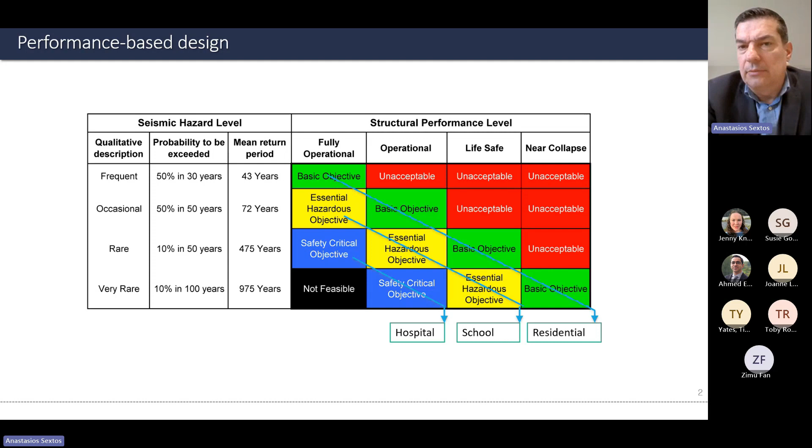So that's basically the way we are designing things in half of the globe, I would say, which is a seismic region. And this is evolving gradually from performance-based engineering into what we are calling resilience-based engineering, which is basically assessing the consequences first and designing to mitigate them in terms of downtime, functionality loss, financial loss and the like, and obviously casualties. So this is the new generation of design of structures.

Now, the problem while talking about resilience is the fact that resilience is very difficult to quantify for a number of reasons that have to do with social and financial factors, how we actually measure downtime, the extent of the loss of functionality. But something I would like to draw your attention to, because it's basic before we start talking about other things, is that resilience is essentially a function of time. We could be talking about a structure, a network of systems, a network of services, a single person, it doesn't really matter.

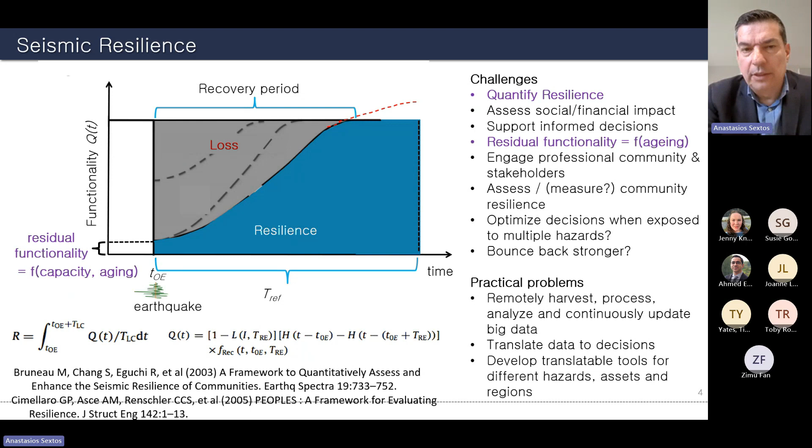Essentially, this functionality or operation is, let's say, 100% before the earthquake and drops down to a residual functionality, whatever that is. Then the system, the person, the building, the bridge, London Underground, Network Rail, whatever, recovers gradually in time until it reaches the status quo ante, the previous state, or even exceeds the previous performance or operation. What happens in between is the loss. The smaller the loss, the higher the resilience. This is how we engineers aim to quantify resilience. Obviously, in social sciences, it's a little bit different, but the idea is essentially how can we recover in the minimum time with the minimum resources to the best possible state.

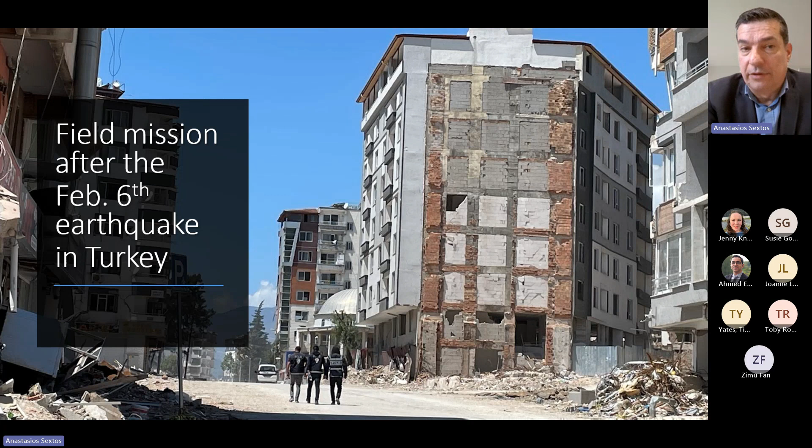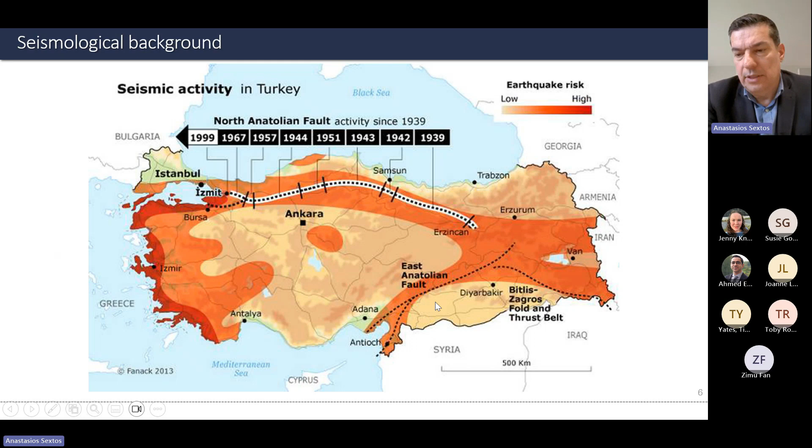Now, some slides from the devastating earthquake that took place about a year ago in Turkey, which was a very strong experience for those of us that visited the place, something that you don't see very frequently, but it relates a lot to the resilience I was talking about. If you're familiar with the earthquake map and the geography of Turkey, this is the East Anatolian Fault, whose rupture led to two very strong earthquakes back-to-back last year.

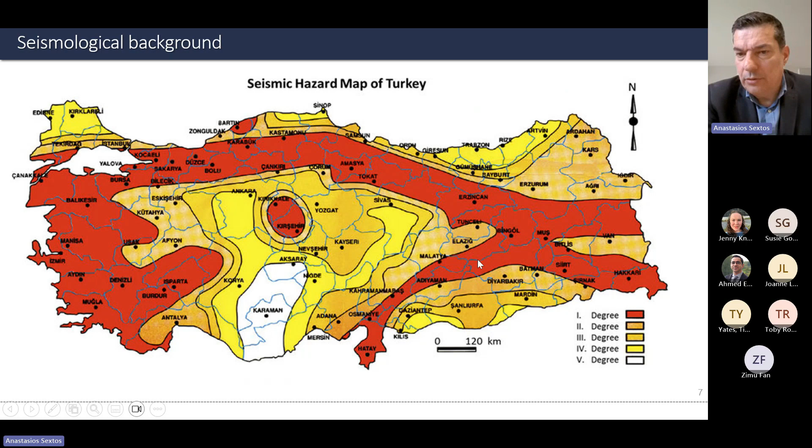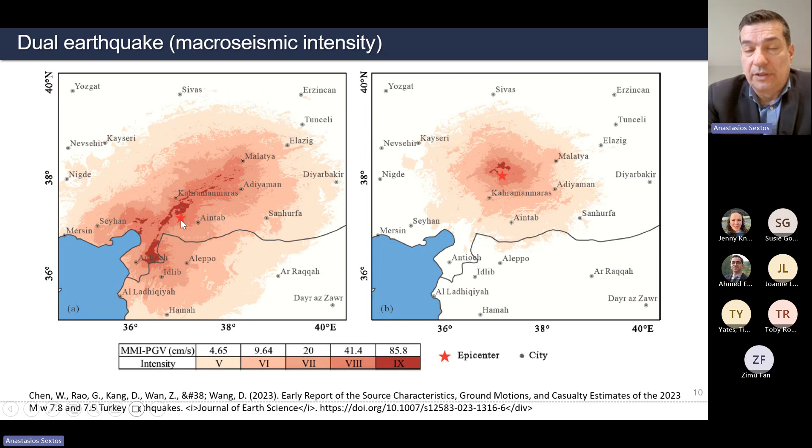And this is a region of high seismicity, because buildings are designed with requirements that are stricter in the places that you see highlighted in red. So we're talking about a region that is known for strong earthquakes. And therefore, as devastating as it is, it was expected, in a sense, to have two earthquakes in the same region, but measuring very strong, 7.5 and 7.8, at a difference of 8 hours.

There is a very simple diagram that we use in earthquake engineering called the response spectrum. On the vertical axis is the acceleration that the building is experiencing. And because acceleration times mass makes a force, according to Newton, that's the force induced on the buildings. On the horizontal axis you can see the period, or let us say, how high a building is. In red are the forces for which buildings are designed in Turkey, with a very advanced seismic code, I have to say. And in gray are the actual accelerations that were monitored during the earthquake.

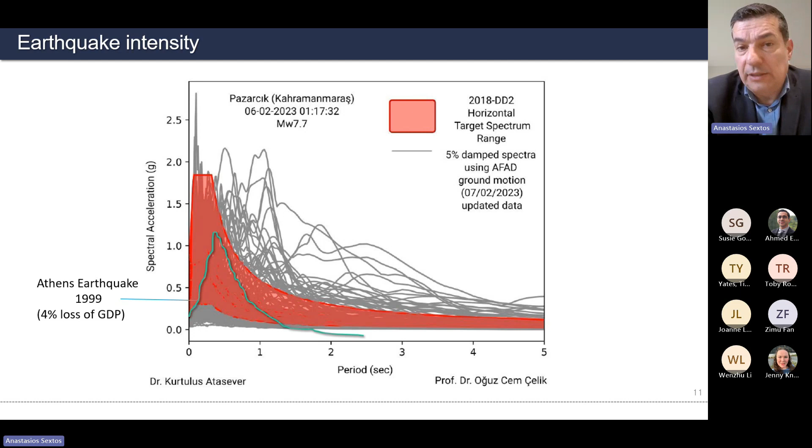And you can easily see that the gray is exceeding the red across a wide range of frequencies and periods, which essentially explains why all these buildings, irrespective of the height, suffered from heavy damage.

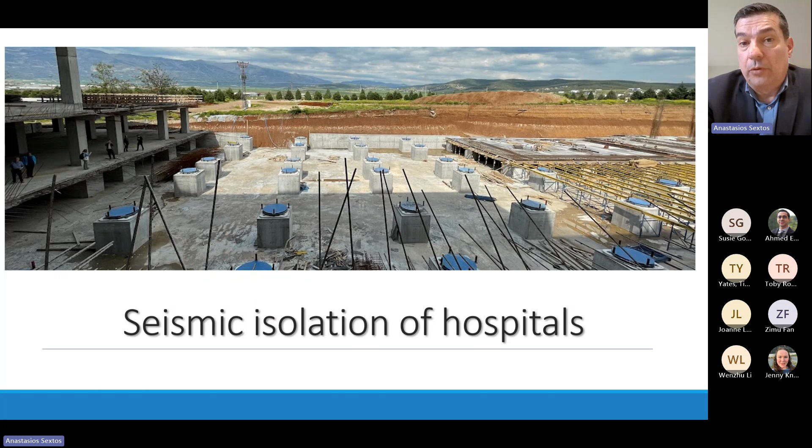Some good news, if we can find good news in this disaster, are seismically isolated hospitals that have performed very, very well as designed, actually. This practically means that buildings are able to slide. There are devices called bearings on a very smooth surface. It's something like a ball that is sliding and is allowing the ground to be moving, but the building not to be experiencing the same accelerations. And then the whole thing is restored back in place.

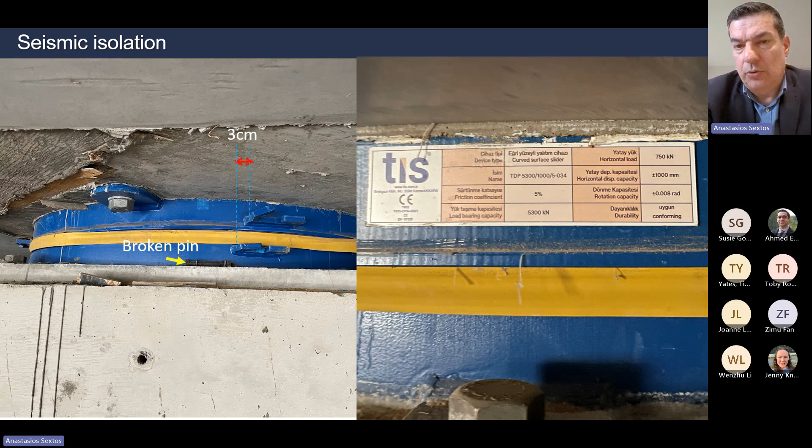And you can see here some successful applications of this technique, with the buildings effectively without a glass broken, whereas other buildings nearby were collapsing. So this is definitely a technique that is very, very promising. The problem is that it's quite expensive. And currently, across the globe, even in developed countries, it is only used for critical infrastructure like hospitals and some administrative structures that have to remain functional after the earthquake.

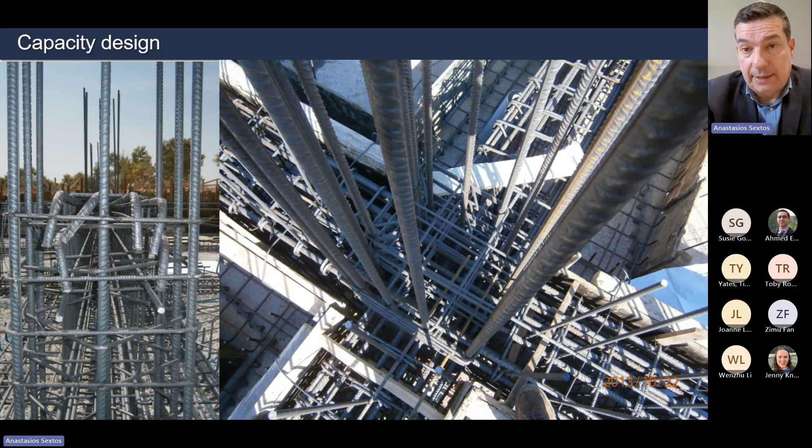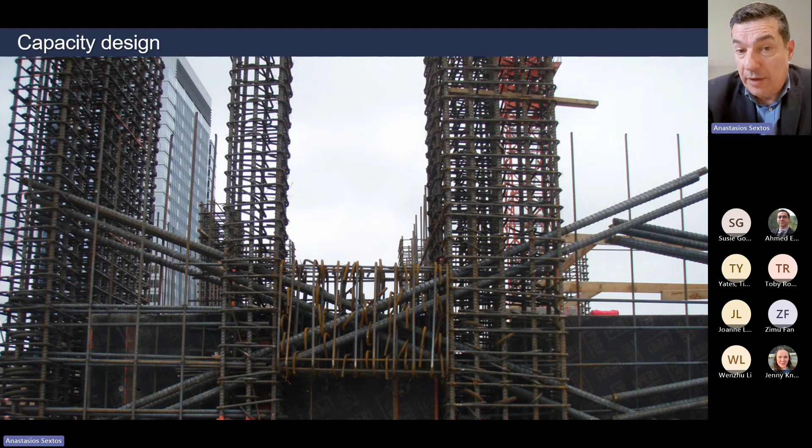So most of the buildings rely for their earthquake resistance on very strong reinforcement. This reinforcement can be very dense, can be very difficult to implement, has a lot of quality control to be ensured, and effectively means that in some parts of the world, yes, you can definitely satisfy these very strict rules, but in other parts of the world, that's what you're seeing.

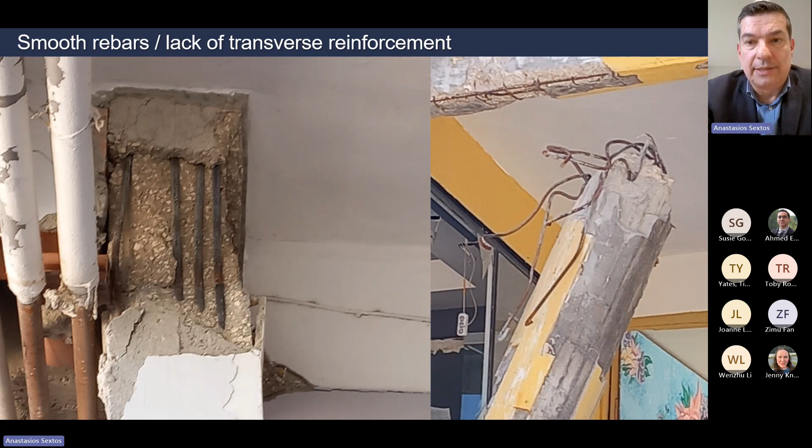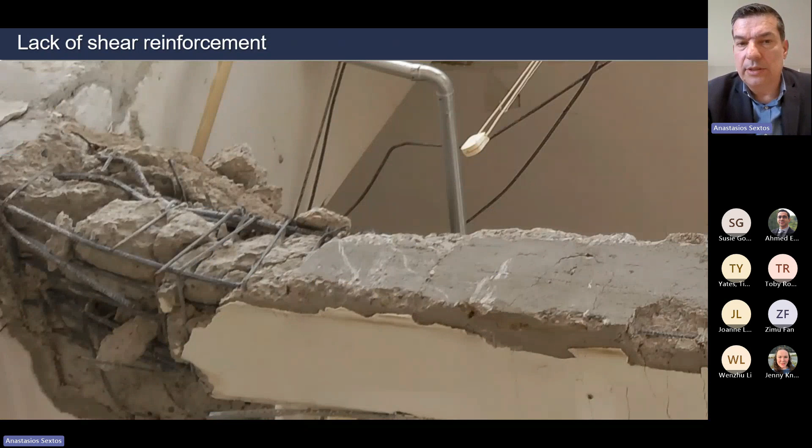If you walk around places like where we visited in Turkey, but also in Greece, in Italy, in some poor regions, in some places where the quality control hasn't been applied properly, or in places where simply the buildings were old enough, where the new knowledge hadn't been implemented at the time, let's say buildings before the 80s. You can just get an idea.

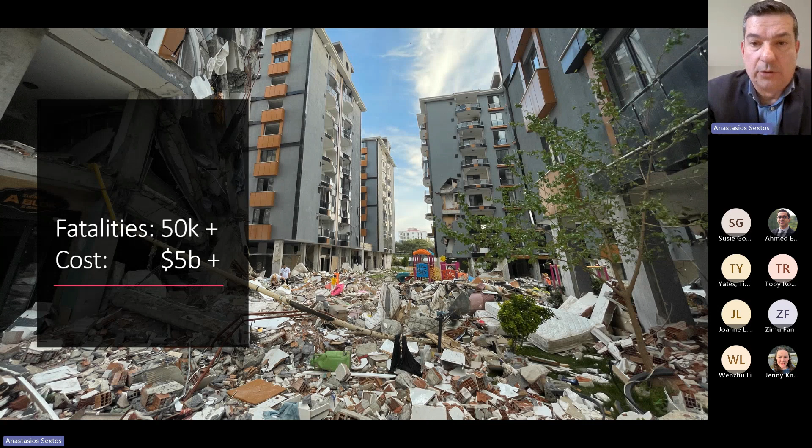That can happen in developed countries, like in Turkey. In developing countries, like Nepal, a similar earthquake in 2015 led to the evaporation of 50% of the GDP in 10 seconds. That's how long the earthquake lasted. So in 10 seconds, 50% of whatever the country owned was lost.

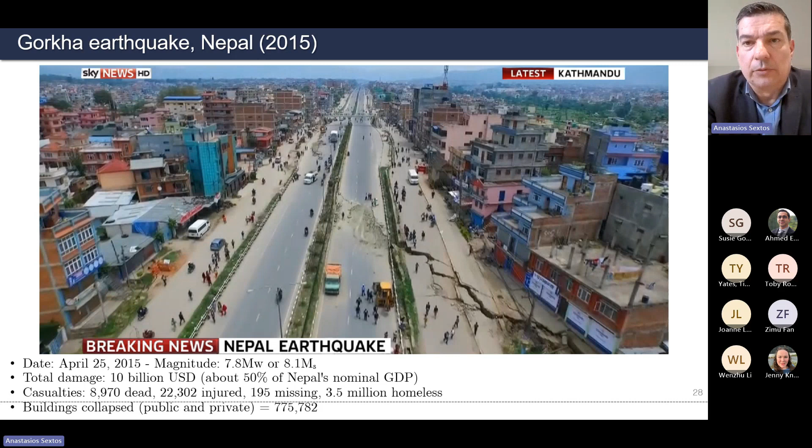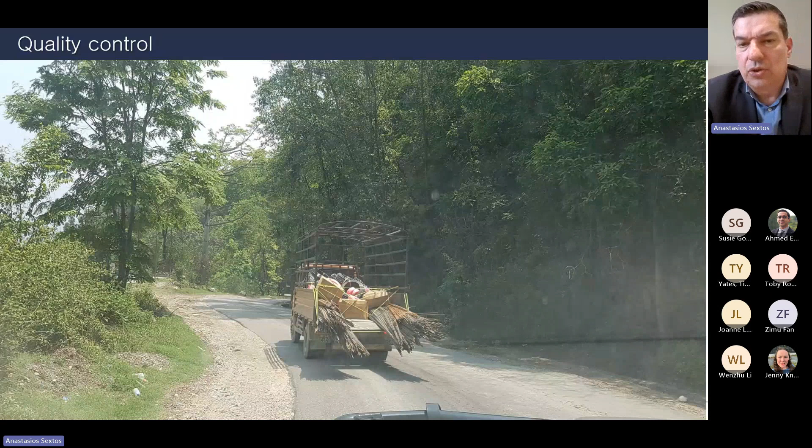So the question is, how can we actually implement quality control in these regions where steel and materials are transported like that, or there's no access to materials, or they are transported in ways that do not satisfy the strength or the resistance of the buildings, and the techniques are pretty much local. So yes, performance-based design and resilience-based design is a very good idea, but it applies essentially to the developed world. In low-income countries, the performance objectives are different.

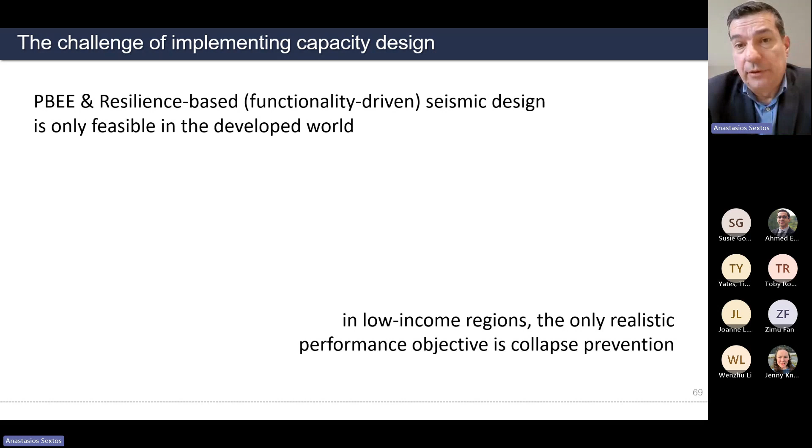So we came up with this idea about 10 years ago. What if we don't trust the superstructure to perform properly in case of an earthquake? And for this reason, we create a base where we will let the building rest with the capability to slide. Slide in a natural way, in a low-cost way, in a low-tech way, with materials that can be locally resourced and could be culturally acceptable by the people.

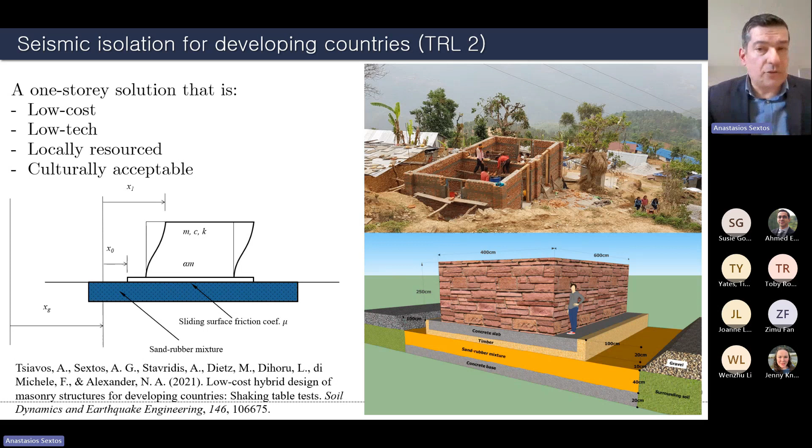Is there such a solution? That would be TRL 1 or 2, I would guess. Let's say the idea, technology readiness level, very, very low. Can we actually do that in reality? People in the ancient world, yes, they thought about it, but in the modern world, how can you apply such a thing? This is the main question.

So we had a large project with many, many partners, including the University of Southampton, Caltech and Buffalo from the US, and Nepalese partners, Arup International Development and Save the Children. So we started studying first the materials. I'm not getting into too much detail. I just want you to get the feeling of how we can turn an idea into practice through large-scale experimental testing.

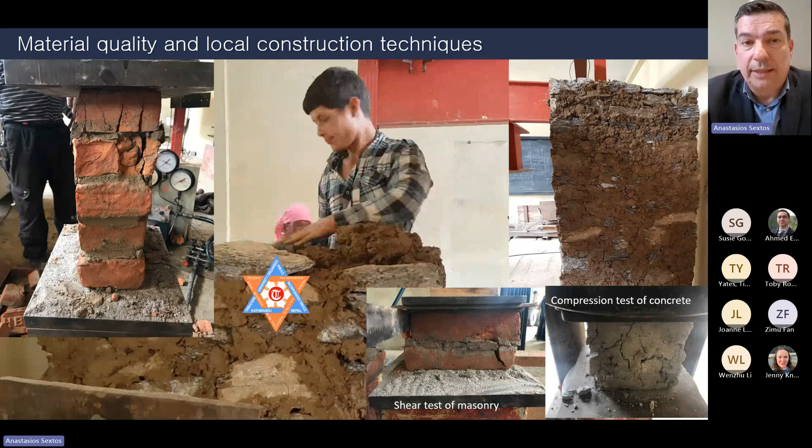So the idea here is that first you have to trust the local people. Let them build in the way they normally build. Don't try to mimic this and bring it to the UK and think that you can do it in the same way. You can't do it in the same way. So we did it locally in Kathmandu. We tested it locally. You can see here even the manual way forces are applied.

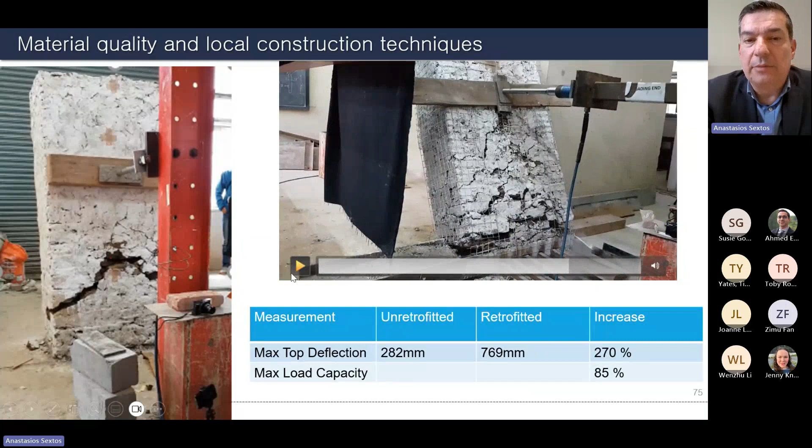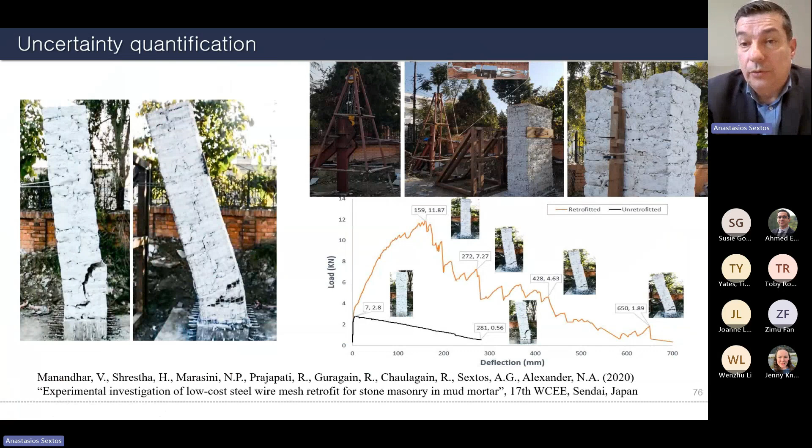At some point, obviously, if you apply too much force, these walls will effectively fail and collapse. And if you repeat it many times, you will be able to assess the capacity of this type of construction. Because if you really want to improve something, you have to understand it. You go there, you interact, you collaborate with the local people. There are too many things you can learn.

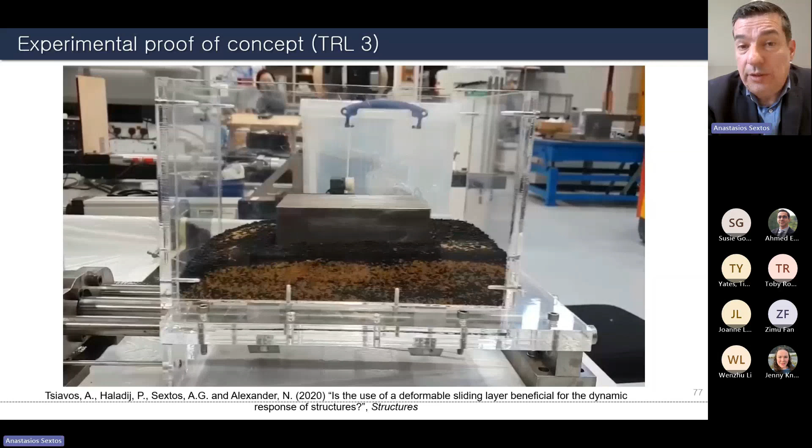Then you go back to the UK in this case. And we said, what if we rest a small building, a very, very small steel box, if you like, on sand mixed with some chopped rubber, which is very cheap to do? Would this box really slide if we shake it? Well, yes. So in principle, it's working. But the bad news is that at the end of the day, it is also tilting a lot. Maybe you can observe it even visually.

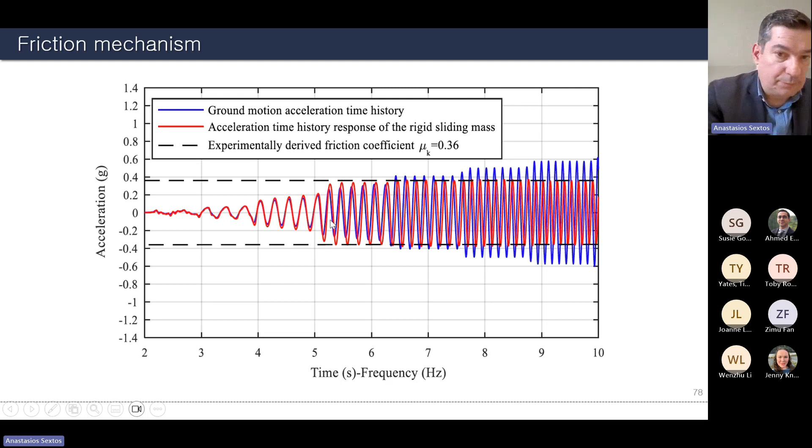So in mathematics, everything works beautifully, and you can say that because the system slides, there is a cut-off acceleration. There is an upper bound of the energy that gets into the structure, which is the red one. So you're applying the blue, and the building is experiencing only the red. So you're doing good. But if you end up with tilting, if you end up with settlements, if you cannot use your structure anymore, what's the point? So we had to try different ways and do this proof of concept at a large scale.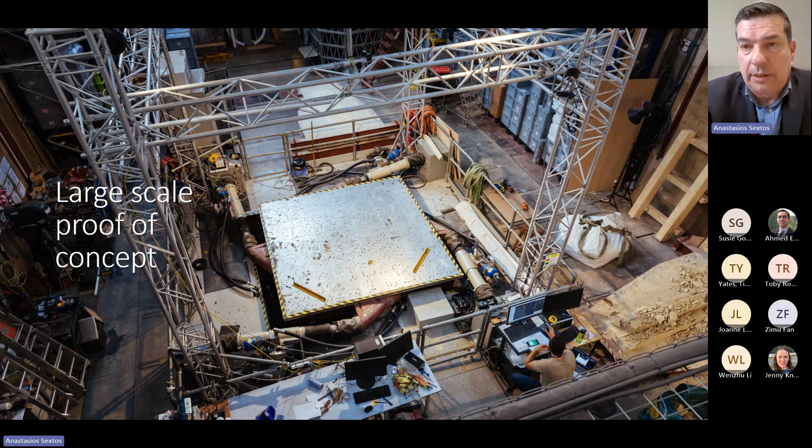This is the laboratory before UKCRIC, the shaking table in the earthquake lab in Bristol. It's a 3x3 shaking table, 6 degrees of freedom with 8 actuators. You can place on that a payload of about 15 tons and accelerate it up to 2G. So that's about twice the earthquake measured in Turkey. So this is very, very large, I would say. And you can do that for 6 degrees of freedom, 3 translational, 3 rotational.

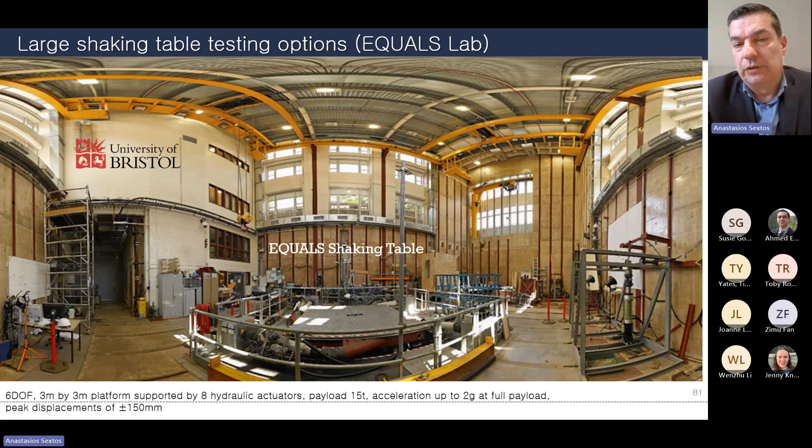But with the aid of UKCRIC, we built a new lab, which I think is way more powerful. This not only has a 3 degrees of freedom shaking table that is larger, but also has a soil pit for tests that involve soil structure interaction. The good thing about the shaking table is that the payload is now about 50 tons. That's the weight of around 30 cars stacked one on top of the other, and you can accelerate that up to 2G for a frequency that ranges from 1 to 50 Hertz. So this is really very, very powerful.

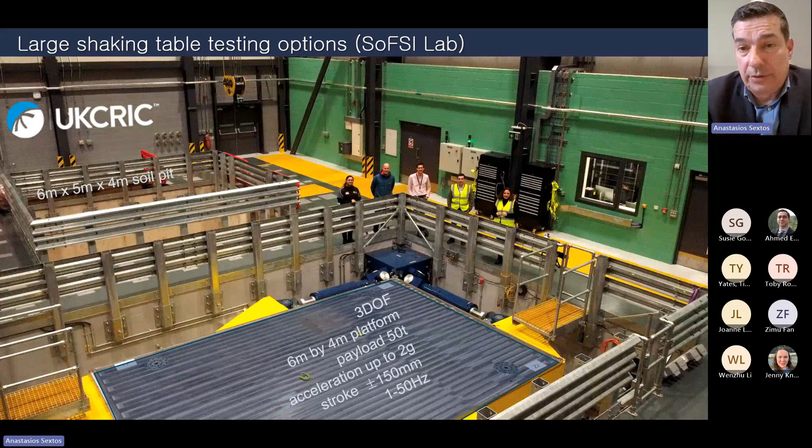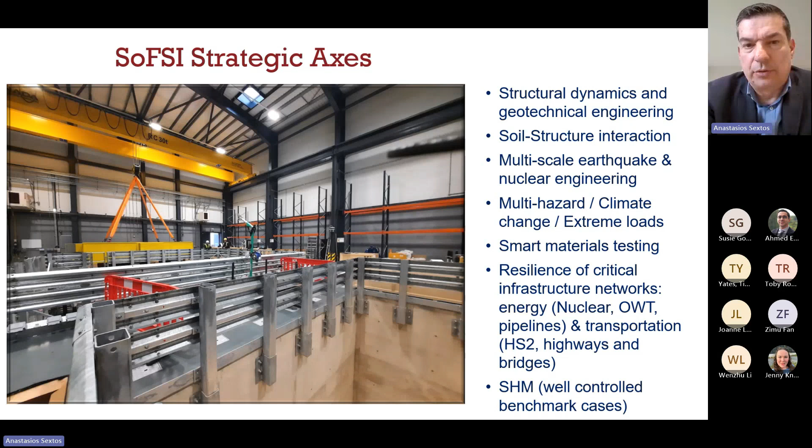And in this laboratory, we can test things that relate to structural dynamics, geotechnical engineering, soil structure interaction, everything from small scale to large scale, from a single hazard, that is earthquake, but we can also have an environmental chamber and use water flowing into the soil pit. We can test multiple hazards. We can reproduce to some extent floods. We can test smart materials. Overall, we're looking at the resilience of critical infrastructure. You can see how the shaking table looks and how it is moving in 2 dimensions. This is really a very, very powerful tool.

Currently, through new projects, we are testing 3D printed units. We are testing buildings designed with new materials. We are testing structures placed into this large shear box filled with sand to include soil structure interaction in our analysis. Whatever involves dynamic loading, whatever involves a case where the loads come from the bottom to the top, that's the shaking table.

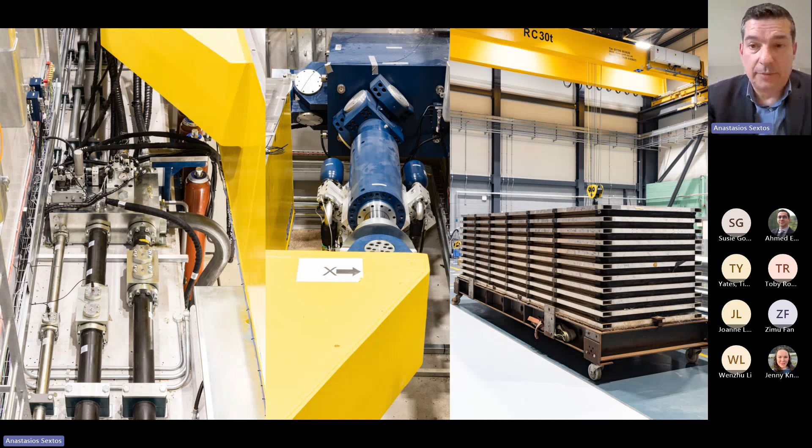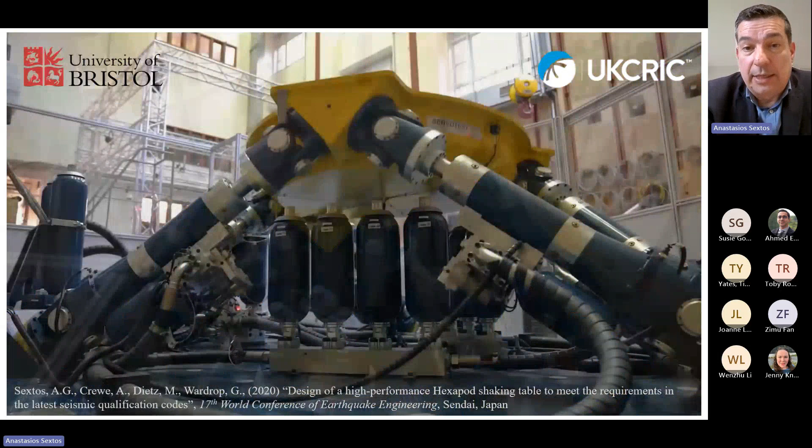In case we need to test something to very high accelerations like 10G, we are going to be using the hexapod, this mini monster, which can go up to very high accelerations for specimens that are smaller, like components of structures located in high-rise buildings, aeronautics or mechanical devices, and other protection schemes.

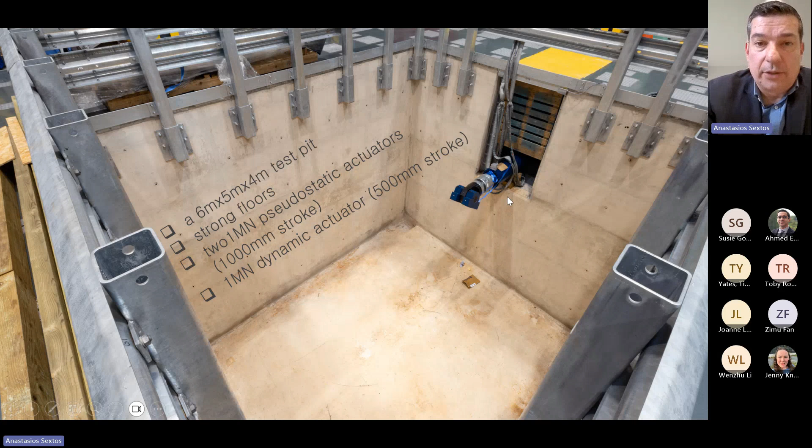And of course, we've got the soil pit, which is a 6 by 5 by 4 meter underground room, if you like. We can apply lateral forces from the side using large 1 meganewton actuators, or we can mount the actuators on the strong floor, or we could create a reaction frame around the soil pit and apply forces from top to bottom.

This is an excellent example of a test that we ran with the University of Southampton and the University of Birmingham as part of Plexus Plus, which was also funded by UKCRIC, and we're grateful for this support. We ran thermal tests, contraction and expansion of integral bridge abutments, filling the pit with sand.

You can see also here how the sand was transferred, how the loads were applied, how does it look like when you push laterally. Everything is instrumented with fiber optics, with pressure cells, and with all the instrumentation you can get. Now we can do that statically, we can do that dynamically. We can test here wind turbines that are supported on sand conditions. We can test floating turbines if we would like to introduce water because there is drainage in the system.

We can do hybrid testing, that's substructuring, and effectively we're preparing now a fantastic test on timber buildings, which is very interesting to do by applying lateral wind forces externally. So these are the new capabilities that we would love to welcome you all to visit and explore possibilities to use the new facility.

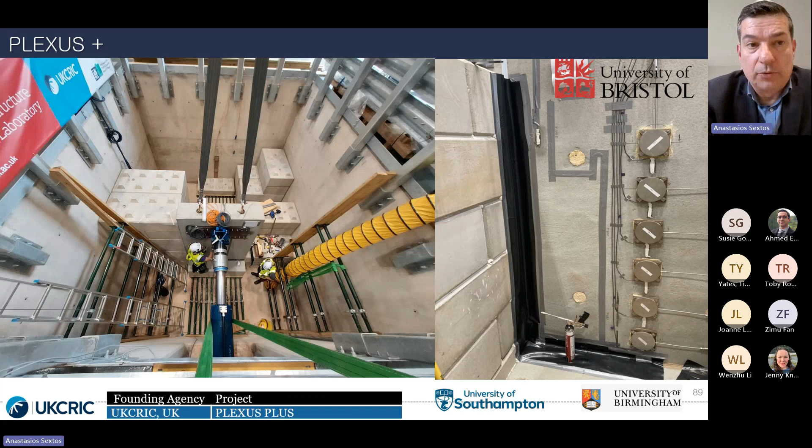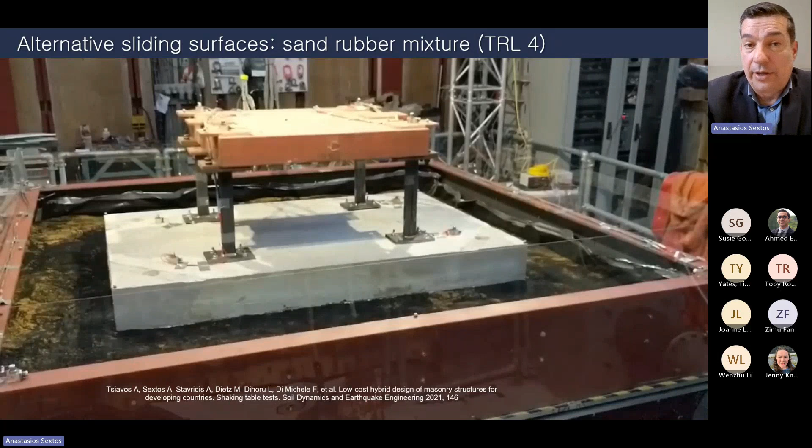But in the meantime, I'm just thinking back to the previous laboratory for one simple reason. Because the tests we were running were involving the vertical component of the motion as well, since this gets into the calculation of the sliding, and therefore we had to do it in the shaking table, which has 6 degrees of freedom of acceleration, including the vertical. For this reason, you can see that we did these tests in a larger scale compared to the small box we were looking at. But effectively, what we learned from this is that, again, it's working very nice, but you end up with some permanent tilt, which is never a good idea.

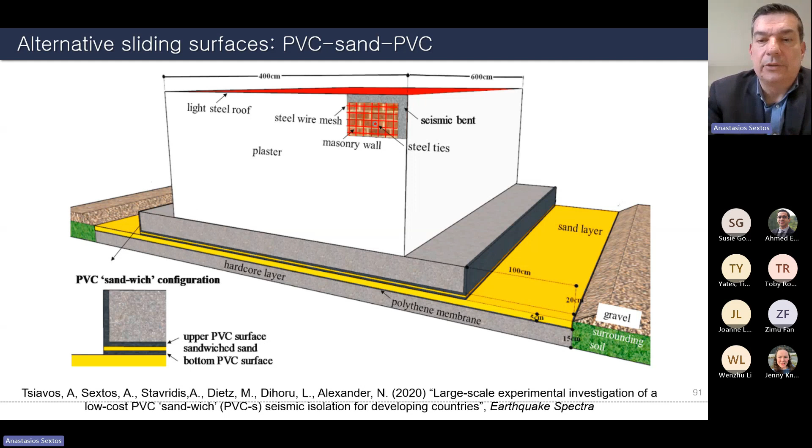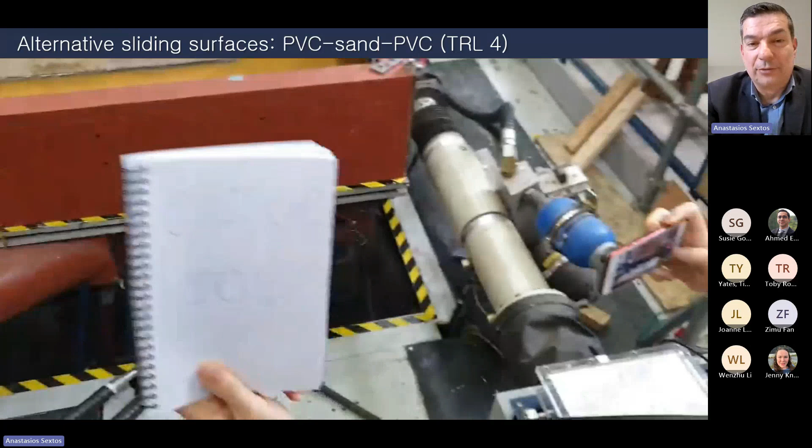So the question was, can we do it differently? Can we actually have a sandwich of plastic, sand, and plastic, and also concrete on top and concrete at the bottom? So it's concrete, plastic, sand, plastic, and concrete. That's the sandwich. And this controls very well the sliding to take place at this specific sand interface. But from this idea into running this test, it was always a challenge. I already told you how challenging it is to convert an idea into something tangible. But you can see here that this time, if you let it slide, it slides in a very controlled way across a very specific interface.

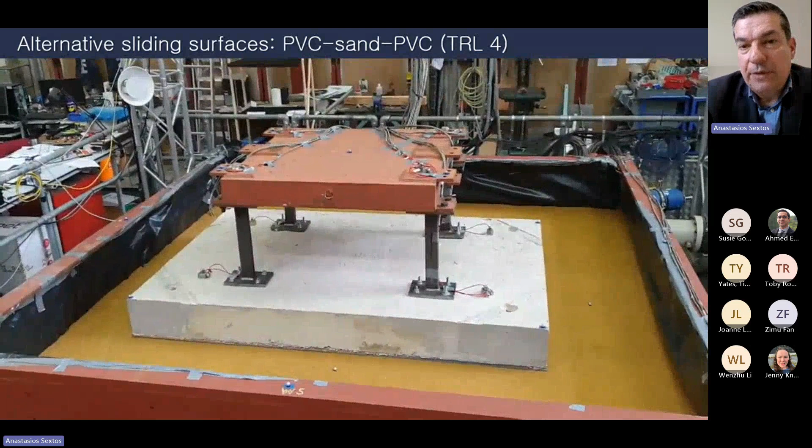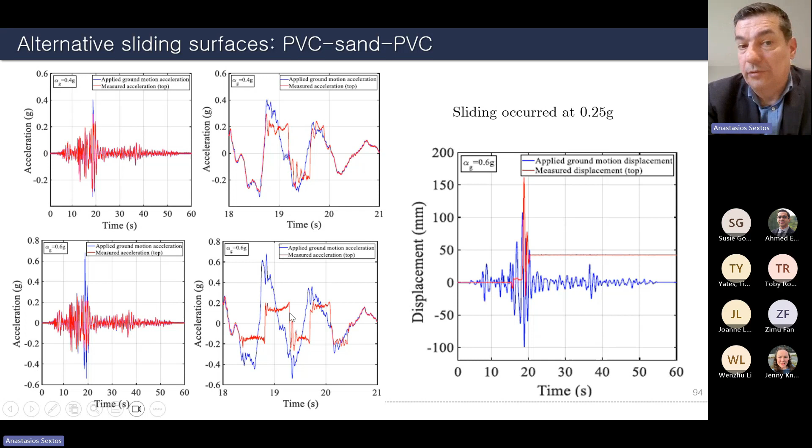And this gave us the advancement, if you like, to reach technology readiness level 4, which means that not only the proof of concept is working, but technologically it can be reliable enough to design further the details. And you can also see here that you are applying the motions, the displacements in blue, and the building is basically doing what you see in red, which is leave some permanent displacements, but in terms of acceleration that relates to the force, the red is always capped at the time that the system is sliding. So without sliding, it would do the blue acceleration, but with sliding, it can only do the red, which is always a good system, I would say.

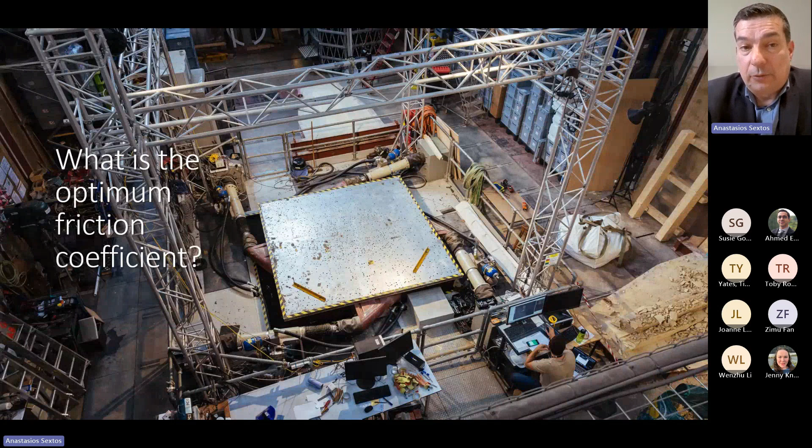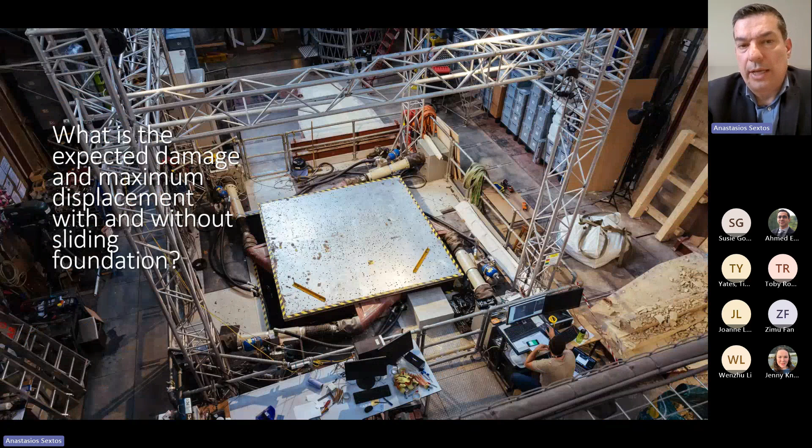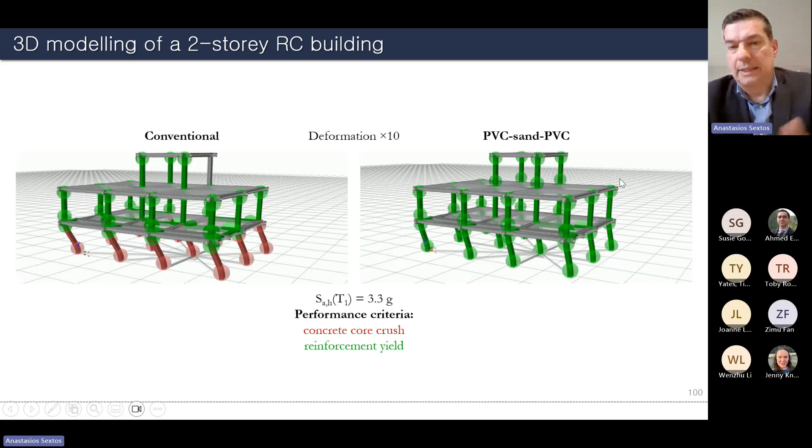So another question was, what is the optimum friction coefficient? That's also an experimental question. And we had several tests that we did using also rollers on the sliding surface with different densities and different sizes. And we also had a very extensive set of numerical probabilistic assessment of buildings mimicking the properties of these buildings. You can see, for instance, on the left, the prediction of an ordinary building that effectively becomes red and collapses because all the first story is lost, whereas the sand building, the PVC sliding system, let us say, remains without collapsing. So these are just some illustrative examples and some technical metrics that we have to compare.

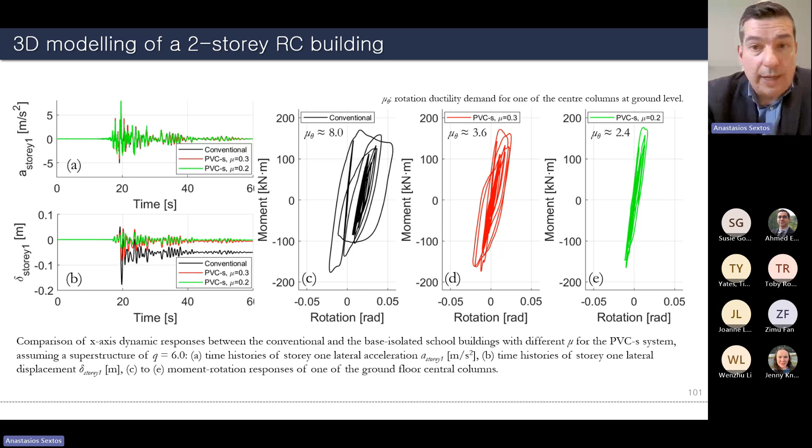When you see a lot of hysteretic behavior, that's a lot of damage. That's what the black line tells us here in the moment rotation diagram. When you see the green one, which is very, very slim, this means that there is no absorption of energy, therefore there is no damage. Therefore, that's a way, way better way to protect the building.

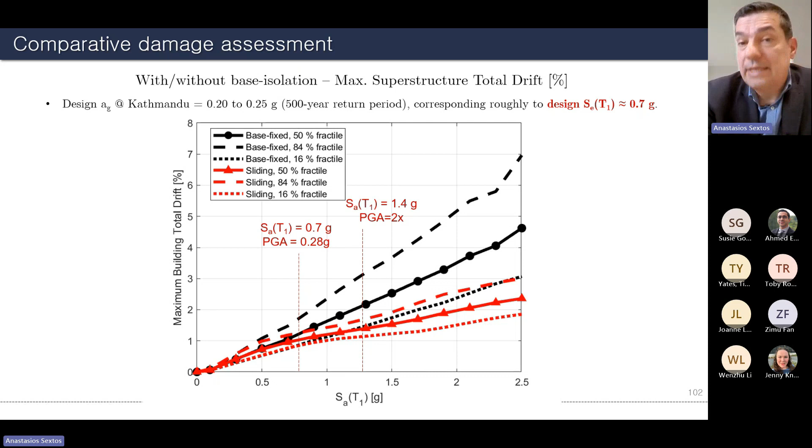And it's low cost. And after all, it's quite effective, because if you do this probabilistically and take the mean, which is the solid black line of a conventional building, with the dotted lines being plus minus one standard deviation of the damage of the building, that's what drift shows in the vertical axis. Essentially, the red one, which is the isolated in a low-cost way, always has way lower damage.

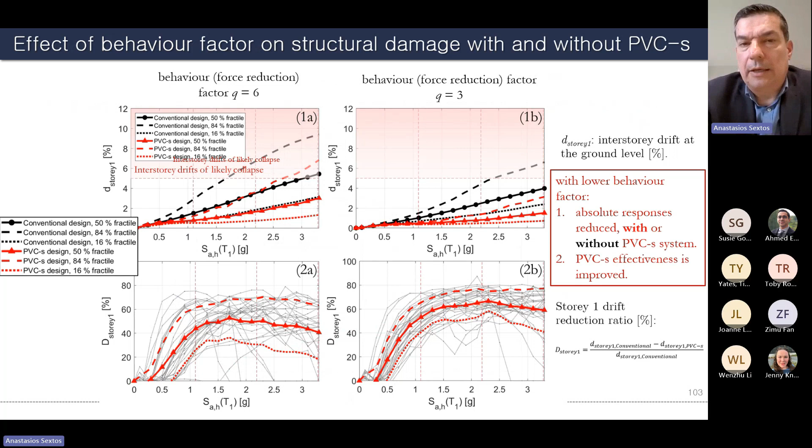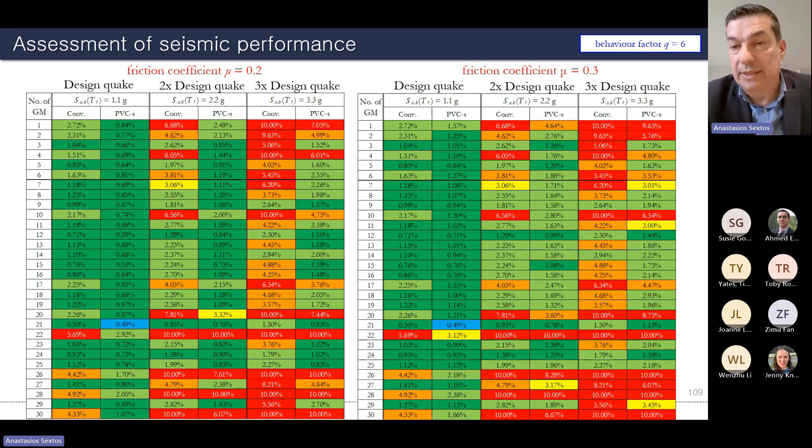Again, I'm going to skip these slides that are perhaps too technical for this purpose, because that's not the purpose of this talk. Just to say that for clarity, this low-cost system, once it slides, it is not able to be recentered, because effectively the earthquake has led the building to be displaced for like 10, 20 centimeters, and then it's not returning to its original position.

However, we have now received funding in the new lab this time, so I'll be very glad to show you this when it's done, two tests for low-cost seismic isolation that has another low-cost mechanism to recenter. In the meantime, and I will close with these slides, I would like to share with you how we converted this idea into actual construction.

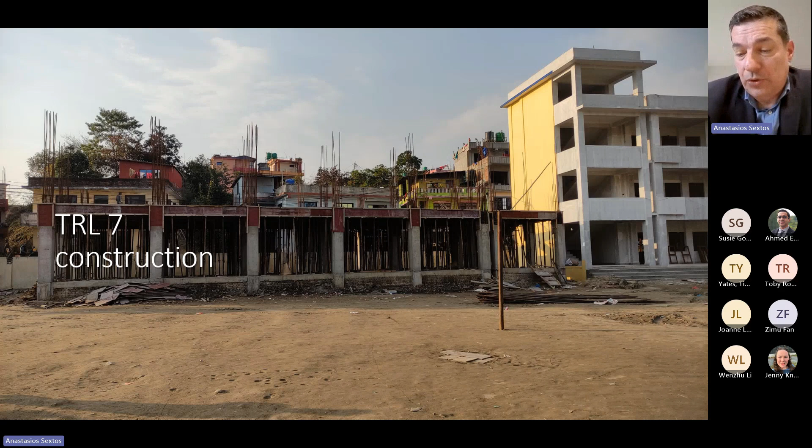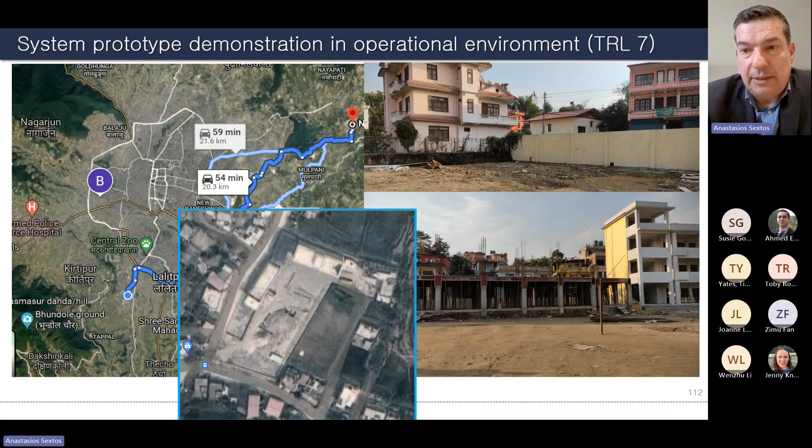So we have been working the last 4 years with the government of Nepal and the Ministry of Education. We have been allocated some space in a school courtyard, and there we have designed the foundations. We have redesigned a new school. The University of Bristol funded the construction of that school. We tested extensively all sorts of sands that we could get from the local rivers in Kathmandu. These sands were packed and sent into Bristol.

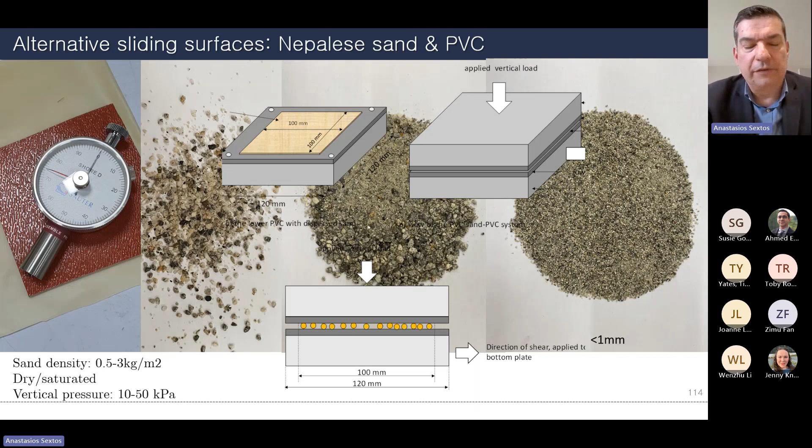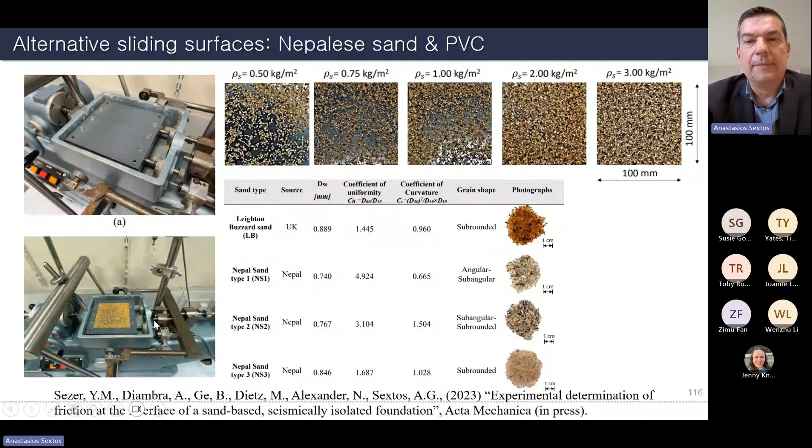We were testing to identify the friction coefficient, different sand density, different water conditions, different vertical pressures, different angularities of the grains, everything you can imagine. We were testing in small scale, in the shear box, in large scale. We did a very extensive work just to verify that essentially the friction coefficient remained reasonably stable so that we could use it.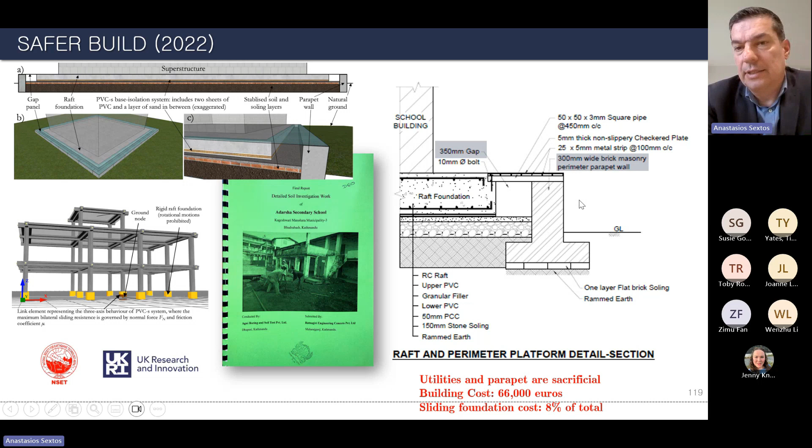And then we designed the building to be effectively not embedded into the ground, but resting on the soil, with a parapet having a gap of about 35 centimeters, a parapet that is sacrificial. So just in case the earthquake leads the building to slide, then this parapet is actually going to be sheared off, and it's going to be just reconstructed after the earthquake, because that's not a problem.

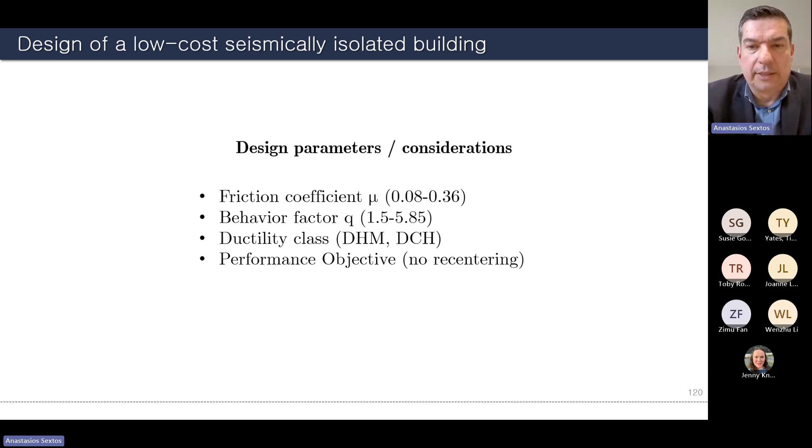These are the key parameters of the problem, involving obviously mechanically the friction coefficient and what we call in earthquake engineering the behavior factor, which is the degree of absorption of energy that's compulsory to account when you're designing structures, and also what is your performance objective.

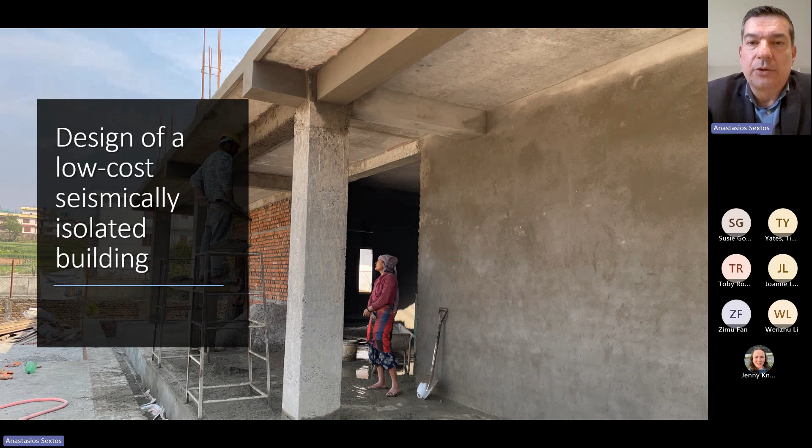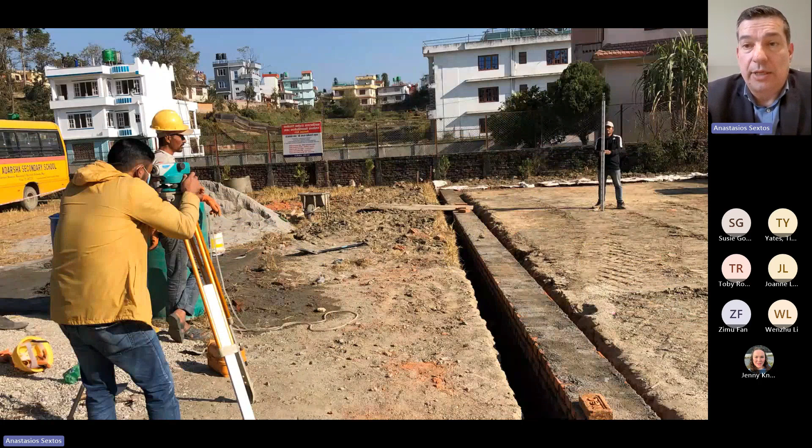Some photos just to appreciate how this new school looks like. Actually, that's the first building in the world that has been constructed with this technique. And it was materialized by our Nepalese partners. So we tried to make it so simple that people could do, and effectively they did it in a very meticulous way. This was taken care by the National Society for Earthquake Technology in Nepal, the non-governmental scientific institution. They did beautiful work in setting up the level foundation.

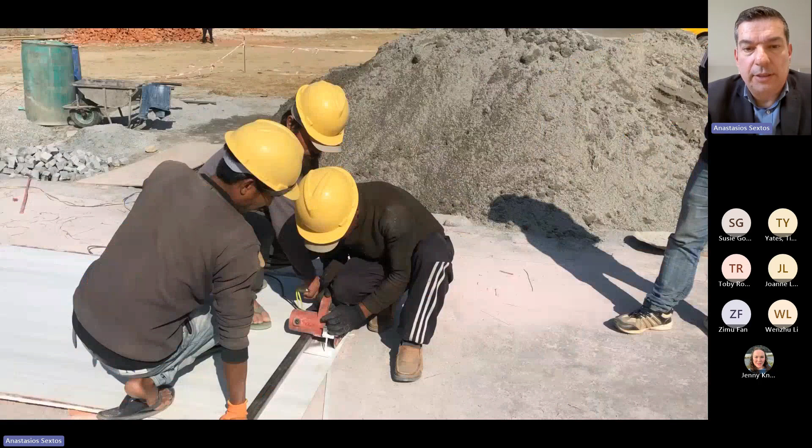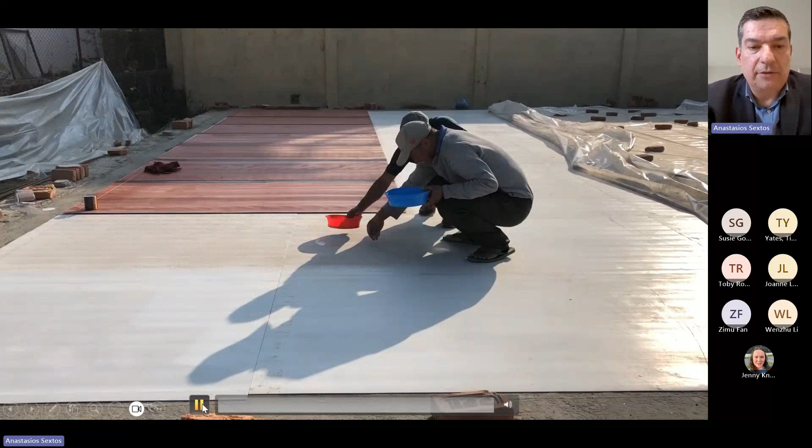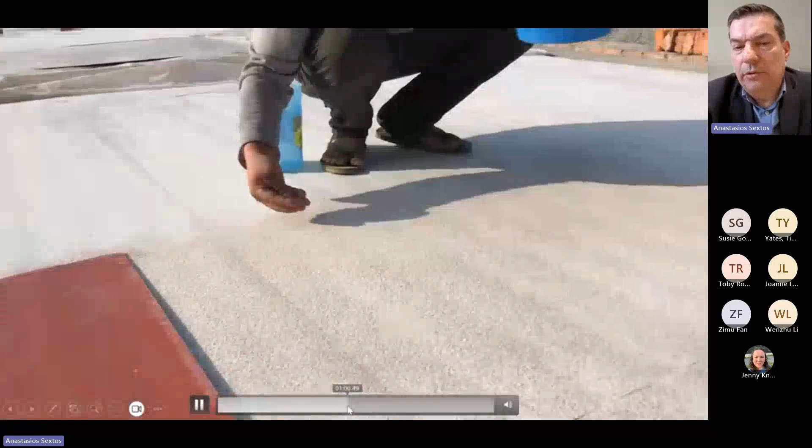Then in introducing the PVC sheets, as you can see here, the video, cutting the PVC sheets very, very carefully according to the guidelines, and then after sieving the sand, they were applying the densities. It doesn't really matter whether the density is exact or a little bit higher, a little bit lower. It's a protective mechanism. It's only doing good on top of what we would do anyway for the earthquake design of a building. That's how the plastic sheets are laid.

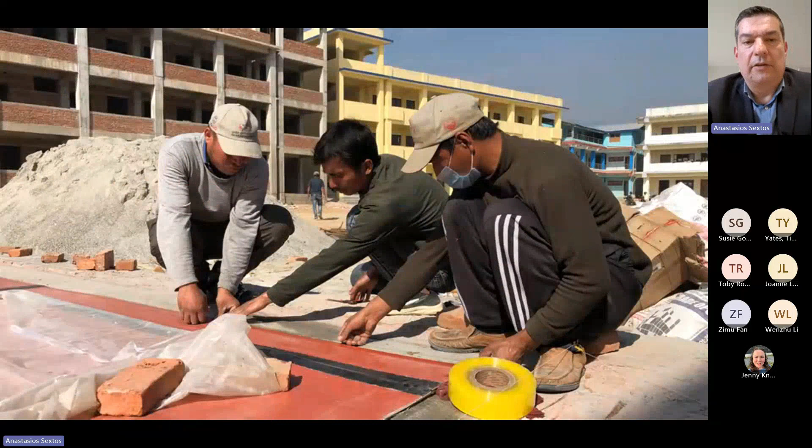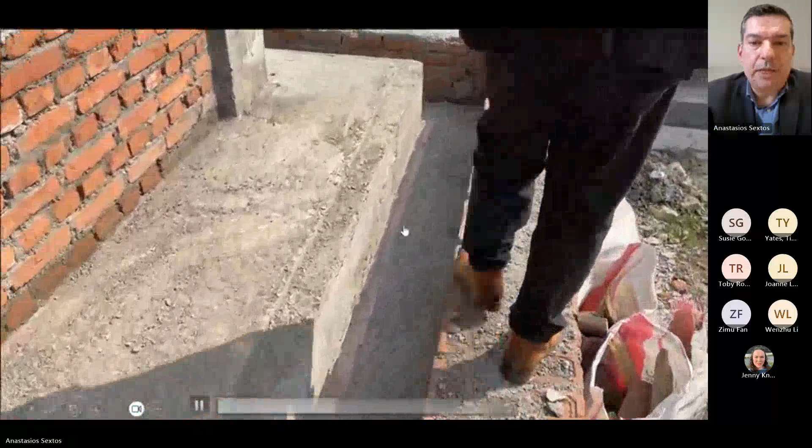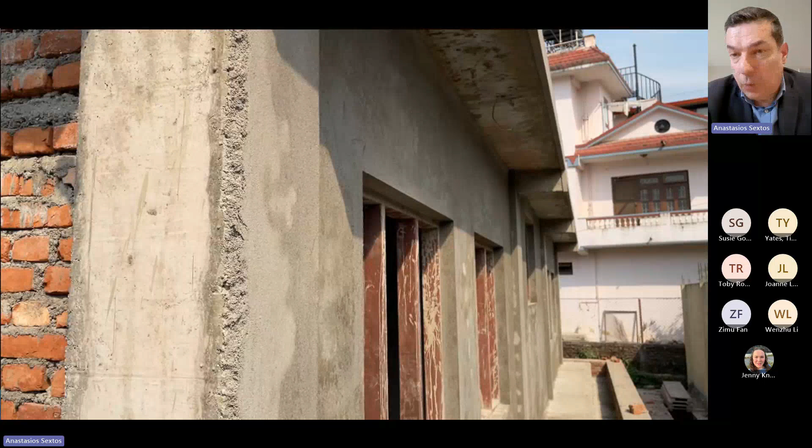And you can see here how our colleagues and workers have been working. And this is how it looks like after it was finished. And that is the gap. During construction, you can see that this is the PVC system at the base of the foundation. So if an earthquake happens from a threshold of acceleration and upwards, it's going to slide and it won't be damaged, simply because it is protected from very high accelerations entering the building.

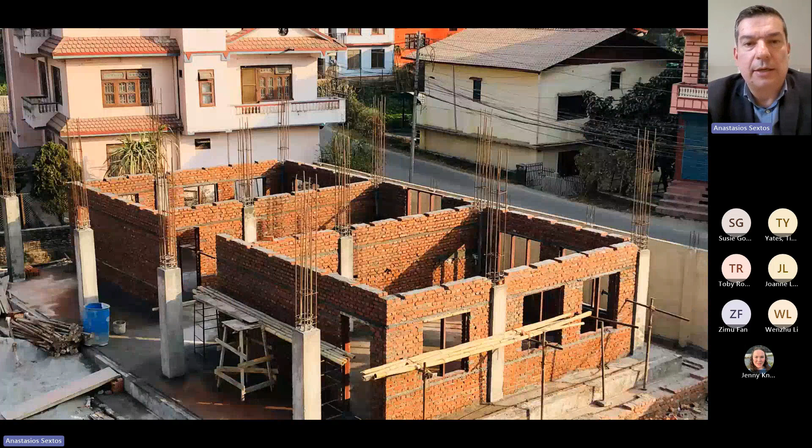And that's how the construction progressed and how it looks like. And this is essentially the current state. We're waiting to get additional funding to monitor the building, but also to build a second story. So I hope that the kids were quite happy to see that.

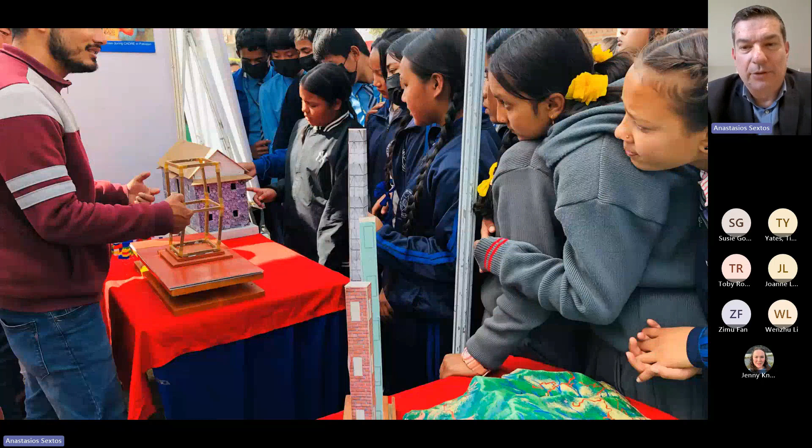And I would like to acknowledge all my colleagues for helping us with this effort, particularly our colleague Nick Alexander, who unfortunately left us, who was the pioneer and a very, very important person in this endeavor, along with the other colleagues and the World Bank who supported this project.

So as a closure, I would like to say three other things that I believe were needed to translate an idea into something real. One was to have the large-scale capabilities to be able to see things, because scale matters, clearly. The second is to have local collaboration with people who are able and willing to deliver this technology. And the third level is to have, obviously, the scientific background to understand how to translate something that is mathematically specific into physically possible, and also something that is technically complex into low tech.

If you manage to bring these three circles into one comprehensive approach, then it is possible, after some years, obviously, to convert your ideas through an exciting journey, really, into something very, very pragmatic. So with that, I would like to encourage you as you are early stage careers, if you have an idea, think it all the way. Not just about writing a single paper, not just about going from one equation to the other.